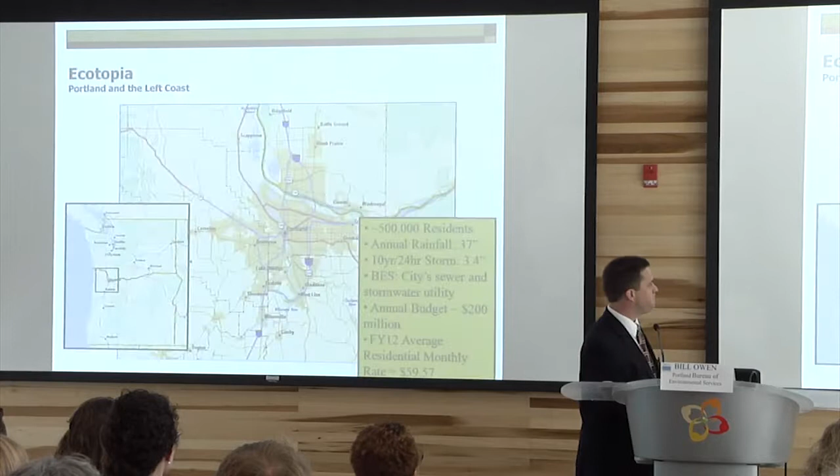The city of Portland is located in the Pacific Northwest at the confluence of the Columbia River and the Willamette River. It has a population of about 500,000 people, and we see about 37 inches of rainfall, which is less than what you folks see here. But our 10-year event, given our rainfall patterns, is only 3.4 inches, about half or just slightly less than half of your similar size event, just for context.

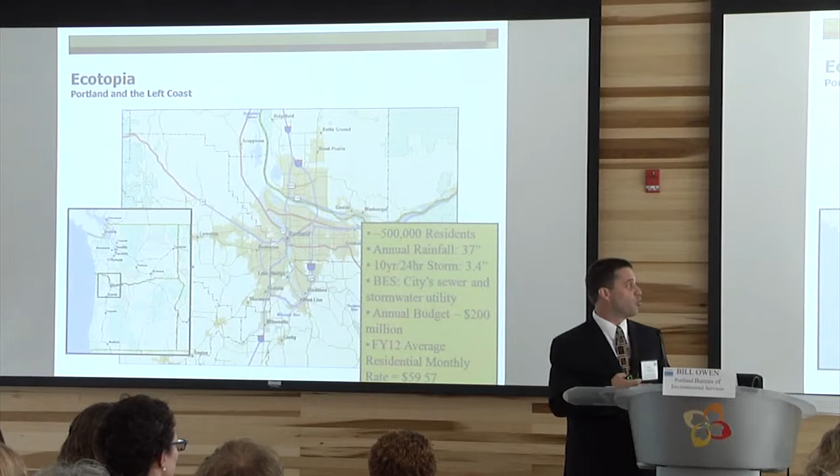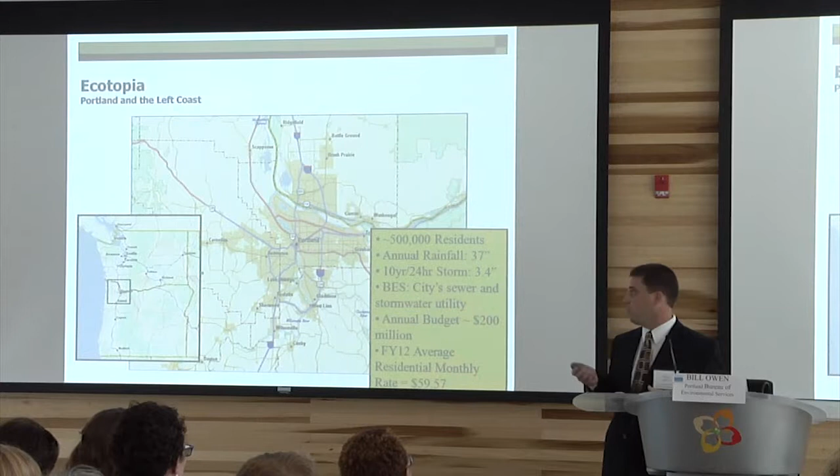I work for the Bureau of Environmental Services, a department that's the city's sewer and stormwater utility. We have about a $200 million annual budget, split approximately in half between operations, O&M, and capital work. We're funded as an enterprise utility through sewer and stormwater rates, and right now that's about $60 on average for a resident. Council just passed the rates for next year, and it's going up 5%.

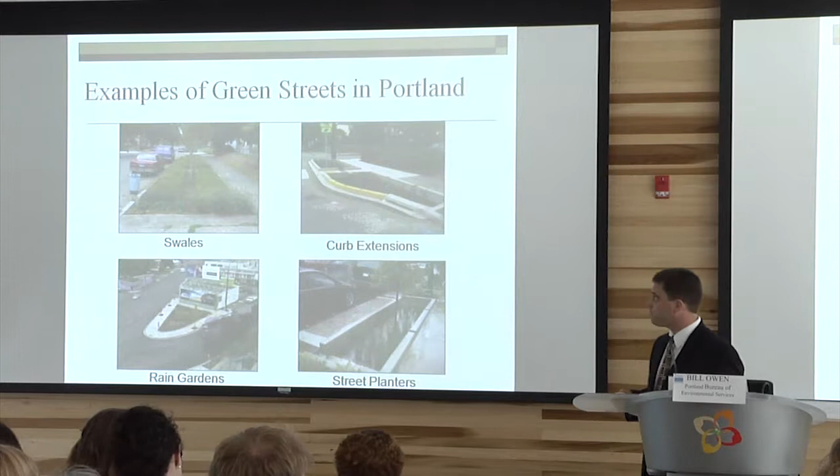So I'm going to be talking a lot about green streets in Portland. This slide gives you an overview of what green streets look like in general. These are all infiltration facilities, generally with no bottom, filtrating right into the native soil. The swales and planters you see are built behind the original curb line and the sidewalk. One type has more concrete to them, the street planters, seen more in our commercial settings.

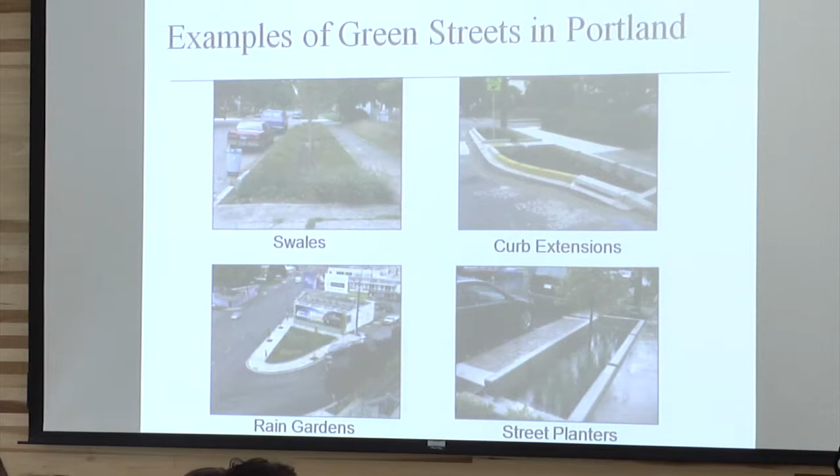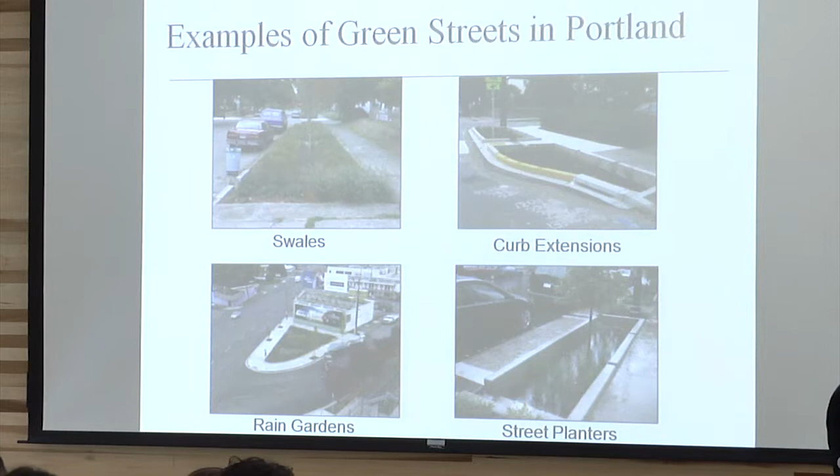In addition, you can see quite a number of stormwater curb extensions in our city. These are facilities where the original curb alignment has been moved out into the street by 4 or 6 feet or so, where water can go directly from the gutter straight into the stormwater facility. In certain locations, not as many, we have some larger green infiltration facilities, what we call rain gardens.

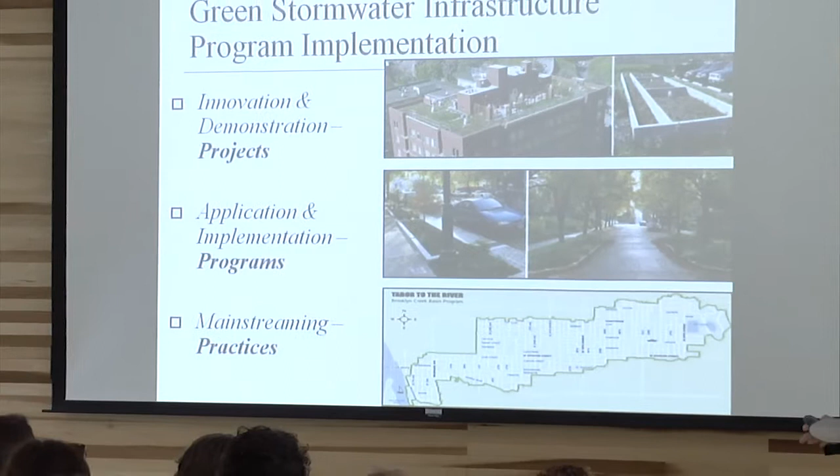Let me talk a little about how we got to this point. As with many programs, you start out with some innovative ideas that, at least for your area, seem pretty neat. You go through some demonstration projects to see if the ideas actually work out in the field. So we did a couple of demonstration projects, but then we learned that if these things are really going to stick around, we need support mechanisms and programs to allow them to flourish.

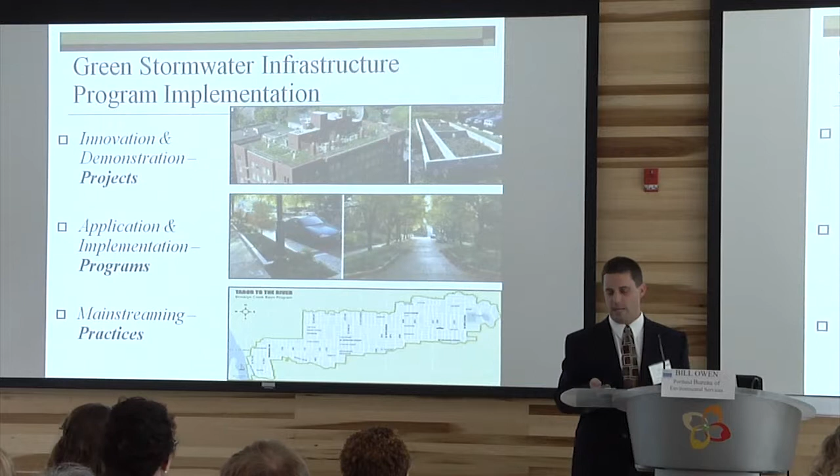After a little while, more programs came into being internal to the city, and eventually we got to the point we're so comfortable with it that we started adopting these into our mainstream practices. I'll talk a little bit about each of these.

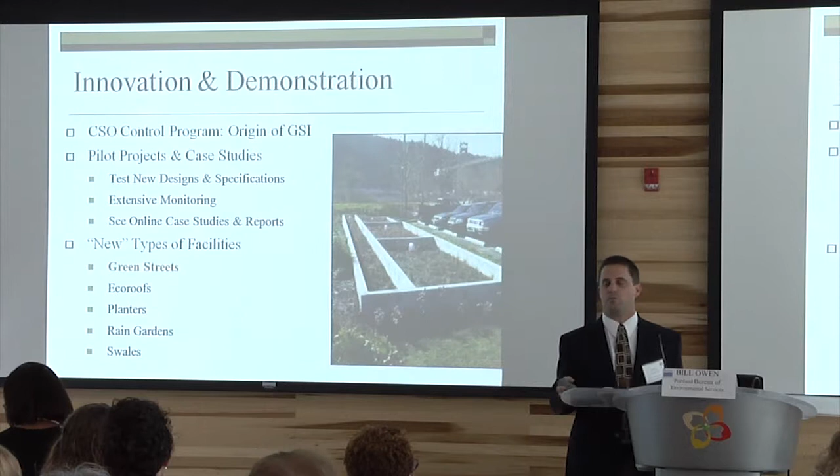Green infrastructure actually started in Portland in the early 1990s as part of the combined sewer overflow program. In our area, we've historically had problems with the combined sewer system, with stormwater and sewer getting into the same pipe, then discharging into the Willamette River. The Willamette River goes straight through the middle of town, so it's very visible, and there were notices all the time when there was overflows—just not a pretty sight.

So we started a 20-year, $1.4 billion program to relieve most of those overflows, and I'm happy to say we just finished those.

But initially, we started off with some green infrastructure work, downspout disconnections, storm separation, not much green, but even sumps, which infiltrate water into the ground, deep into the ground.

But later into the 90s, we started looking at more pilot projects for green streets, some of the ones that you saw up here. And we started doing testing out of our lab with a facility there just to determine how effective these facilities might be as we keep building these.

What the Sustainable Stormwater Program did a great job of is they continued to do this while monitoring what was happening, and they documented it and reported it. A lot of those case studies and reports are online, and I'll give you some links to those sites at the end of the presentation.

So we were messing around with green street facilities and eco roofs all through the early 90s into the early 2000s. The downspout disconnection program was wildly successful early on.

So in 2000, they came up with a solution for that, which included basically separating the combined sewer from the stormwater. There's over 120,000 linear feet of new sewer pipe in this original design, shown in green here. But you also see a lot of other colored lines, which indicate pipe that had to be replaced in the combined sewer system as well. This was about $140 to $144 million worth of work.

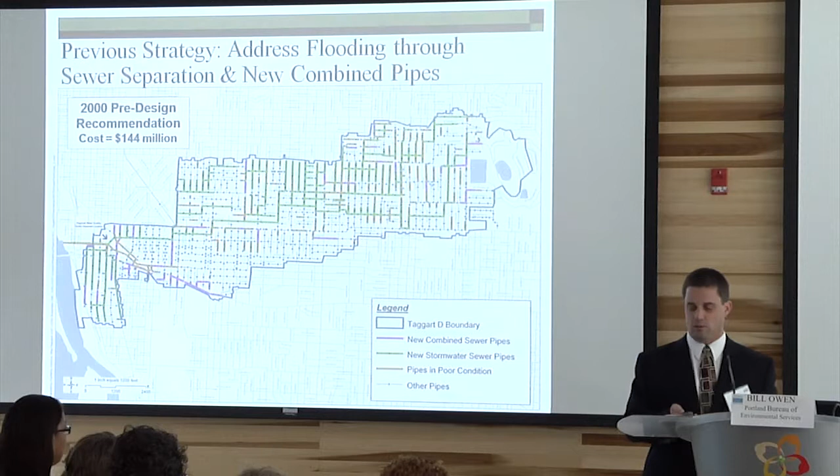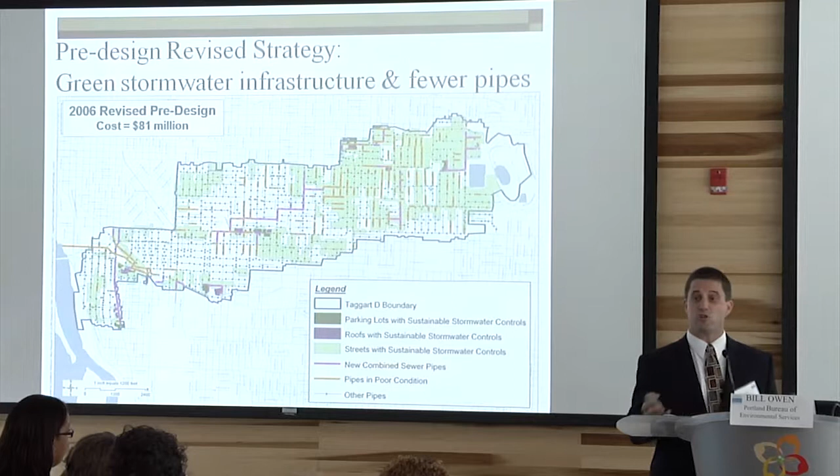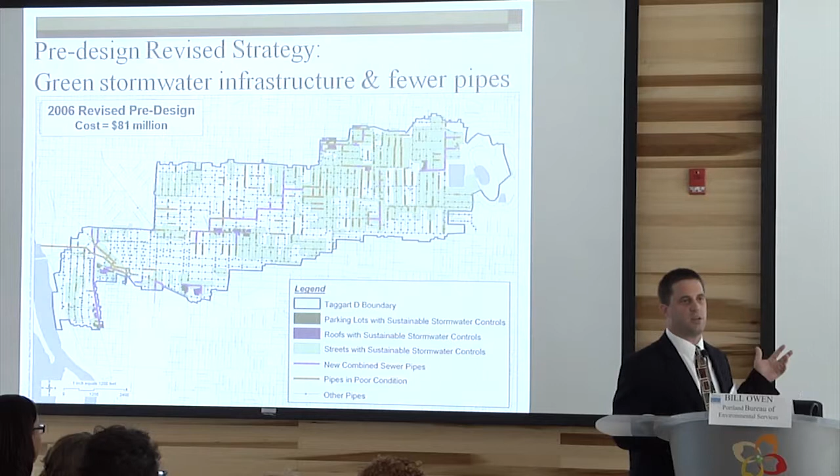But this was just at the point where demonstration projects for green infrastructure were starting to move forward. In the mid-2000s, they asked me and another team to come up with an alternative design that embraces green infrastructure, uses these new standards, and re-looks at the pre-design. The result is what you see on the screen: an $80 million fix, about a $60 million difference.

Instead of having 120,000 linear feet of new pipe, we have 500 Green Street facilities put in here. The green polygons on the map represent drainage areas to each Green Street in this case. But you also notice there are a lot of colored lines up here.

Green infrastructure does great work, but it's not the solution for everything. In this case, there's lots of combined sewer system that still needs work, whether the pipes have to be upsized or just replaced because they're too old.

In addition, because we had this green theme, we tried to do as much as we could in the right-of-way, but that wasn't enough in some cases. So in very targeted areas, we identified areas for partnerships with adjacent property owners to manage runoff on their own sites. That's what you see up here in purple and in dark green.

I'll talk a little more about the program. As this was finished, we rolled out a new project delivery team to complete this work instead of using our traditional CIP team to finish design, construction, and so forth. We tweaked that a little bit.

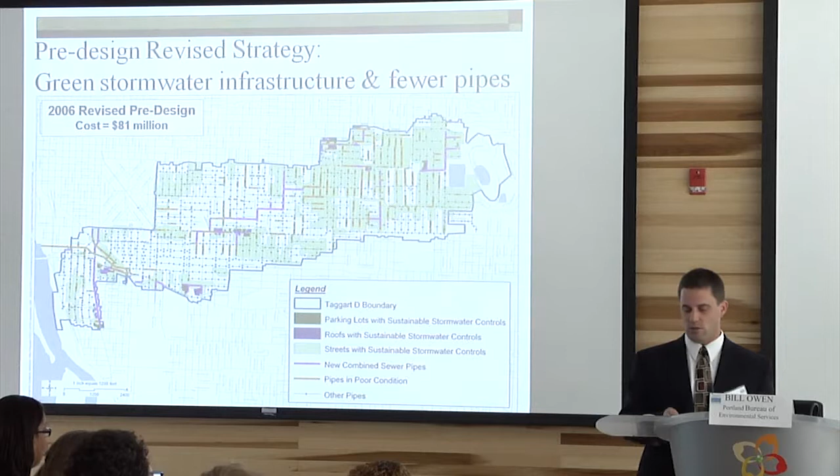Now we have landscape architects on this group, a public involvement specialist, and environmental scientists, in addition to folks like me who are engineers and technicians. So the Tabor to the River program has 4 components.

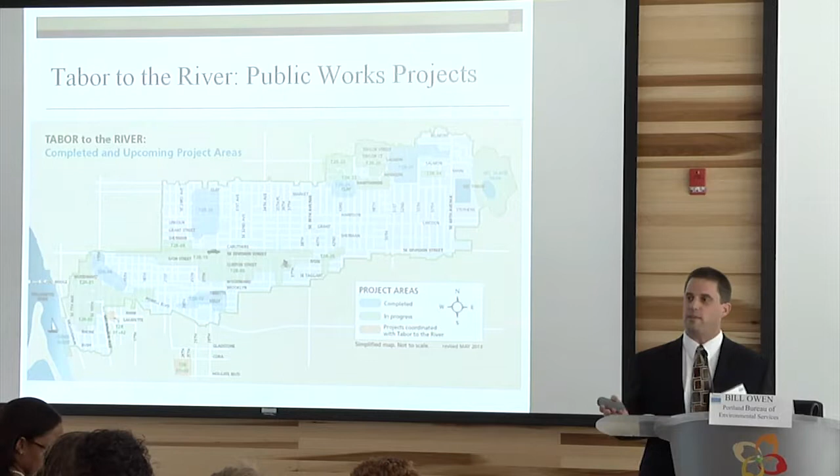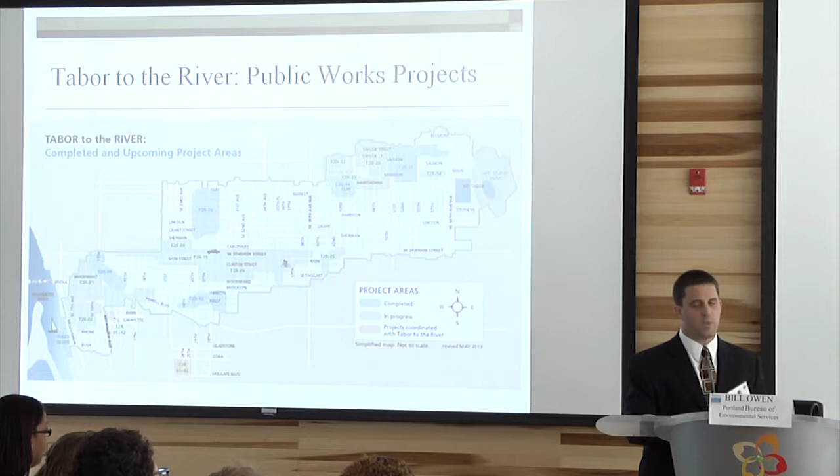One includes capital projects, which is the bulk of the money. There are about 35 different areas within this program area that consist of all the capital work. The blue areas on screen represent projects that have already been completed, and the green areas are the active projects, either in design or in construction.

On the private property side, remember these are just targeted areas, this is not across the basin.

We go out and talk individually with residential and commercial properties within a given area and say, listen, we can give you a little bit of money, not a lot, and we can help you with the permitting and some of the other technical pieces of it, and would you be willing to retrofit your own property to allow water from your parking lot or your rooftop to go into this new rain garden. In this case, it's a residential rain garden, before and after shot.

And the property owner says, sure, that's great, under the best case scenario. The only thing the property owner has to do is sign a long-term O&M agreement that says they will maintain this facility because it's partly a public facility. That agreement is attached to the deed, so regardless of property owner changes, that piece is still part of the deed.

A third piece of the program is vegetation and livability. We love trees in Portland, just like many places in the country. The goal here is to plant 3,500 street trees in this program area. We also have 30 acres of parkland and open space that we want to revegetate and get rid of invasive species. And finally, we recognize the value of having green open space, not only for stormwater purposes, but also for livability in a neighborhood.

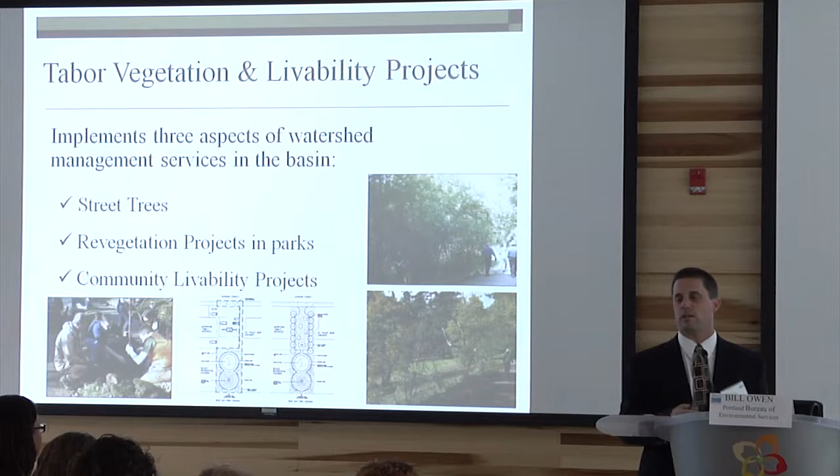One of the biggest, at least fundamentally, parts of our program is public outreach. All of our capital work in the city has a public involvement specialist involved with the project, but this takes it a step higher and says, we have to not only do public outreach on a particular project, what happens next to your house, but across the program area. So the program area-wide outreach continues throughout the 15 years of this program, not just when the projects start and stop.

As all of you know, people learn from different varieties of communication, right? So we use a trailer on a bike sometimes to have a mobile community event that we can move around in outdoor settings that shows how eco-roofs and green streets affect neighborhoods.

In some cases, we partnered with a local college and photography students to come up with shots of green infrastructure that was done on property. And now we have an art exhibit of stormwater infrastructure. This exhibit travels from coffee house to grocery stores and other places in the community and stays there for a month or so. So people see it as they go shopping and say, oh, what's that? And there's a little plaque explaining what that involved.

On the project side, remember that was programmatic. On the project side, we've amped up the outreach a little bit by allowing the adjacent property owners to choose the plants that will go into the Green Street facility, so there's some connection with them to the eventual vegetation in the facility.

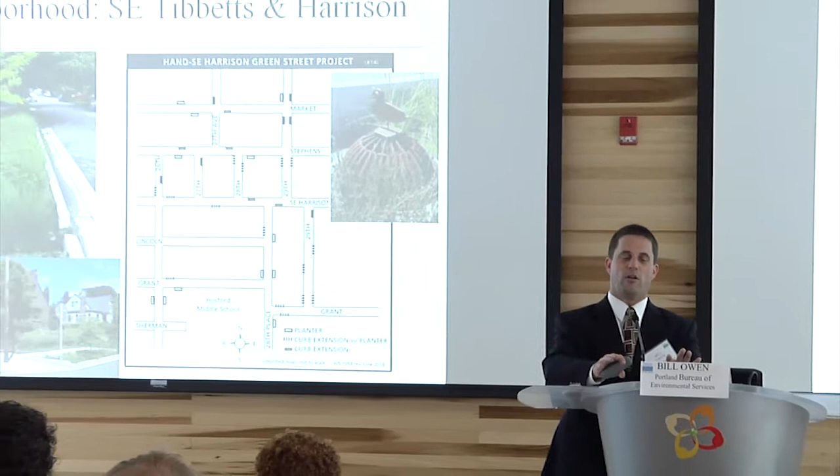We had a lot of swales that you see in the upper left-hand corner here, as well as curb extensions. In this case, on the bottom left, you can see there are two curb extensions at a corner, but in addition to that, we built out the corner, pushing it out a little bit. So now the pedestrian using that corner has a shorter distance to travel from one ramp to the other, which is important, particularly near schools, which is the case in this area.

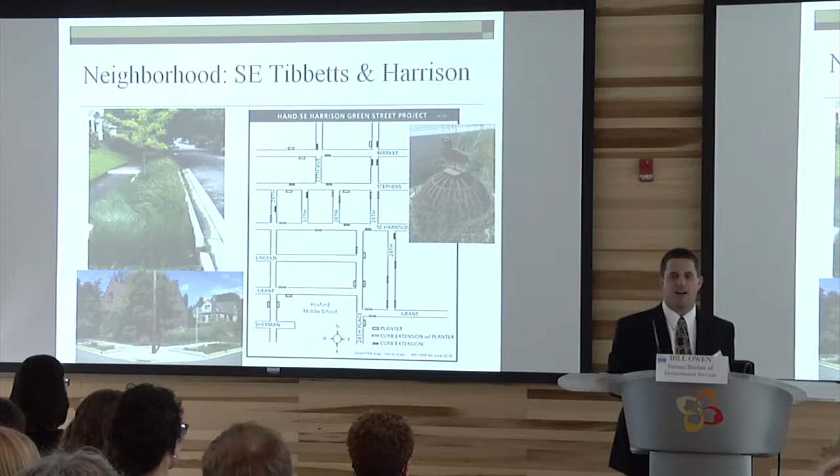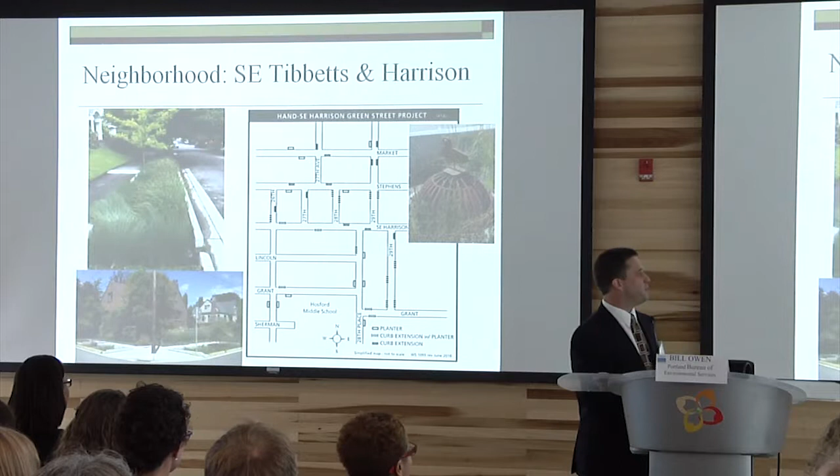I put in the photo on the far right because I just thought it was funny. Someone decided to put a smiling duck on top of our cast iron grate, which is the overflow of our Green Street facility. I thought, hey, this is some level of appreciation that the community thinks this is good stuff. At least that's how I interpreted it. Whether or not that's true, I'm going to go with that theory.

So a couple things to think about as you put Green Streets in the right-of-way. There's more than just Green Streets in the right-of-way, right? The street was there first. There are utility poles, there are mailboxes, and there are trees. The trees in particular, I found this interesting.

Some tree species just can't handle a lot of extra water that gets infiltrated right next to them. For decades, they've been accustomed to having a little bit of water infiltrate in that planting strip. But now the city puts in this infiltration facility, and there's all these gallons of water now, and in some cases it'll kill the tree. So we work pretty closely with the Urban Forestry Department to see where green streets are appropriate in relation to mature trees. In addition, of course, traffic is on streets.

Initially, we didn't put any paint on our curbs, so people started parking there. Why are people parking in the travel lane next to a curb extension? This is not what I was considering when I was designing this thing. So now we paint them yellow, so the parking enforcement arm of the city can go out there and ticket those folks.

Unbelievable. So the other thing is, you're accustomed to driving certain patterns in your own neighborhood for years and years. But now here's the curb has moved. And if you're out late at night enjoying life, the next morning you can find your car may be inside this curb extension. That's what happened in this bottom right-hand corner.

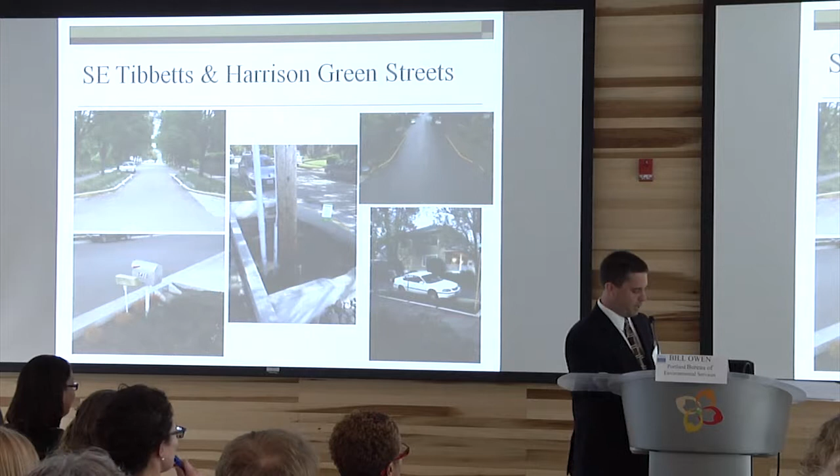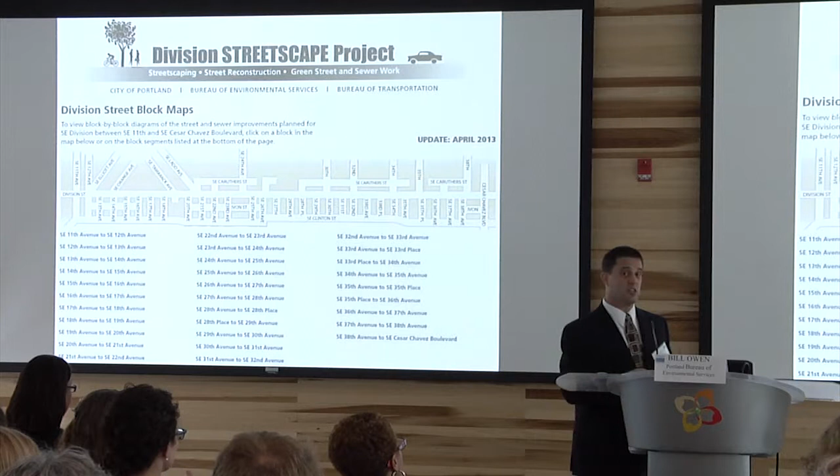The next project I'm going to talk about is the Division Streetscape project. The Transportation Bureau initiated the streetscape concept and finished their concept design in 2005. Our bureau also has an interest, as part of the TABOR program, to improve stormwater and watershed goals in this area. So we recognized both of us are doing work in the same area, so we have a joint project now. The design just finished and just advertised. The idea here is to combine both ideas.

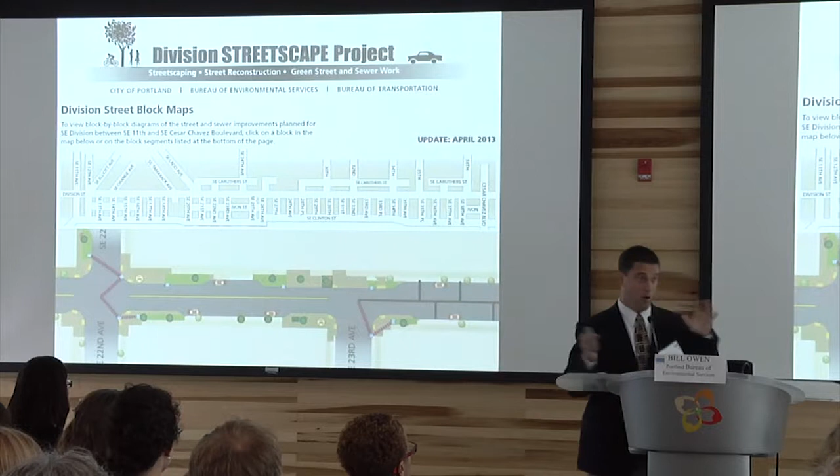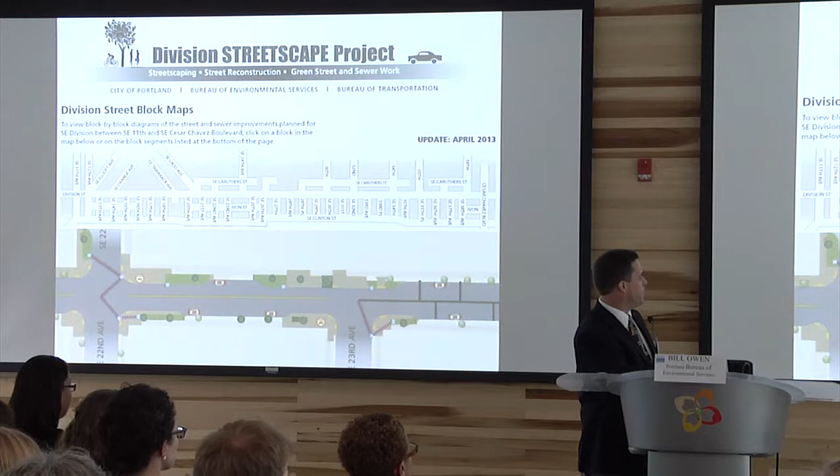Initially, Division was a 4-lane arterial route. Transportation Bureau decided to cut out 2 lanes and leave those spaces for parking for the commercial, residential and retail district in that area. But that opened up all sorts of opportunities for green infrastructure here. You can see these light green areas where the stormwater facilities will now be located in one block, just one block of this 25-block area. Construction starts this summer and will last about 18 months or so.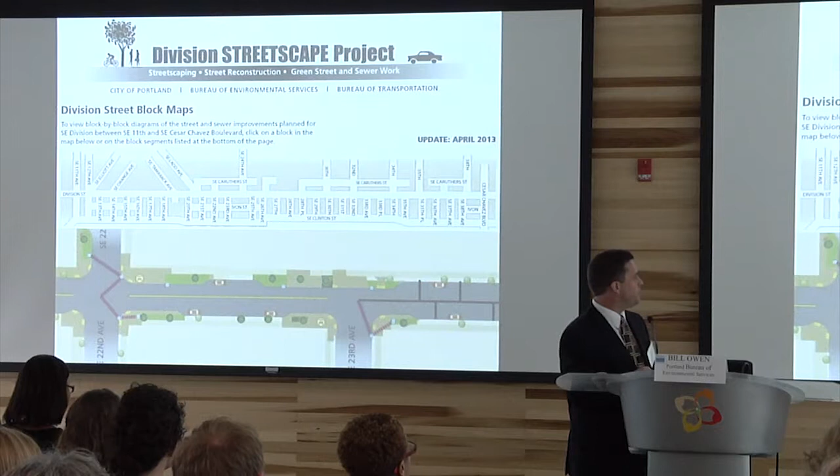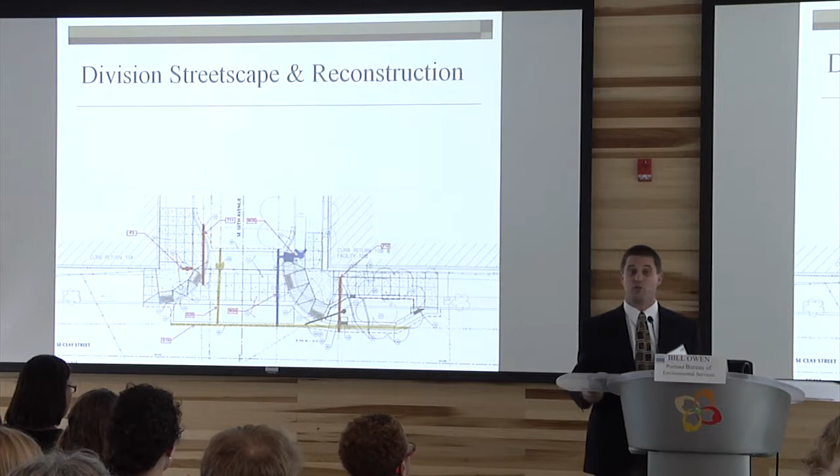So the street not only has things on the surface, but the subsurface as well. For any design, you have to figure out where the utilities are. Green streets are no exception. So the green streets are there, and then all of a sudden you realize there's a gas main right there, or a service line to someone's house. What are we going to do about that? Is it okay if water just travels right past it? You have to work with your franchise utilities and partnerships to figure out what we're going to do to protect your assets as well as do the work that we want to do.

So in some cases, you put a rock gallery. Or in other cases, you end up putting a plastic liner on the street side to protect a pipe trench that the Water Bureau built, because they don't want stormwater traveling down their trench and compromising their structure. And even after you do all of that work, you start construction, and then, oops—it's kind of hard to see. Whoops, my bad.

But there's a 30-inch steel main there, and it wasn't on anyone's records. Maybe that doesn't happen in New Orleans, but it happens in Portland on occasion. It was like, oh my gosh, 30 inches, that's a big deal. Well, in this case, thankfully, it was abandoned, so we could just cut right through it and put in the lead we needed for the under drain. But yeah, things like that happen. It's a busy place, the right-of-way is a busy place. But there is room when you work with your partners to make sure you can come up with both goals to make sure this happens.

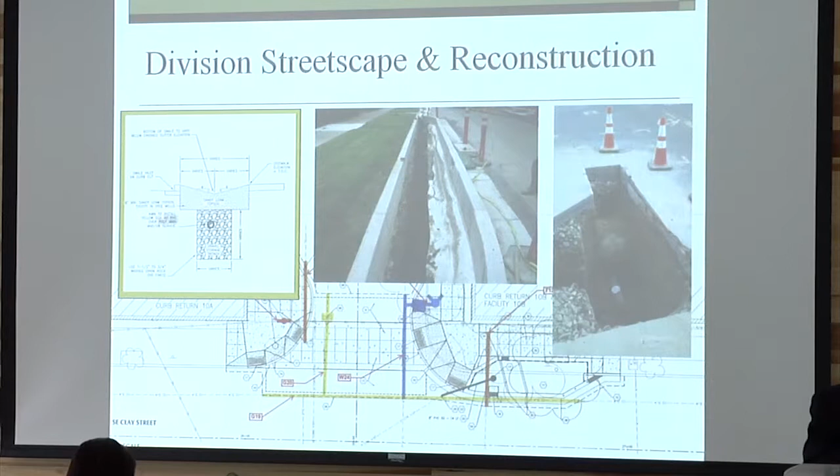Another example is a neighborhood greenway up in northeast Portland. This project just finished construction last week, and it was initiated by our Transportation Bureau to improve bicycle mobility through the city. They turned all the stop signs so bicycles can continue all the way through without stopping, except for the really busy intersections.

This was a really cool project, because as a sewer and stormwater bureau, we had a similar interest to further our mission work as well. On the far left, you can see a curb extension, again with yellow paint, that helps delineate along with the new stripes in the street and the concrete traffic island where bicycles can go and where vehicular traffic can go. This particular intersection was kind of complicated, and there were a lot of accidents between bicycles and cars here, so it was a big improvement, we think, for safety purposes.

The center image is a block that the transportation bureau blocked off for vehicular traffic. No cars or trucks can go through there anymore except for emergency vehicles, and it's right next to a school. Bicycles and pedestrians can continue going through. But we tore up the road and changed it so everything sheds to one side. From the way you're viewing it, from the right, all the water drains to the left side where there's a curb extension, and the water drains and infiltrates into that curb extension.

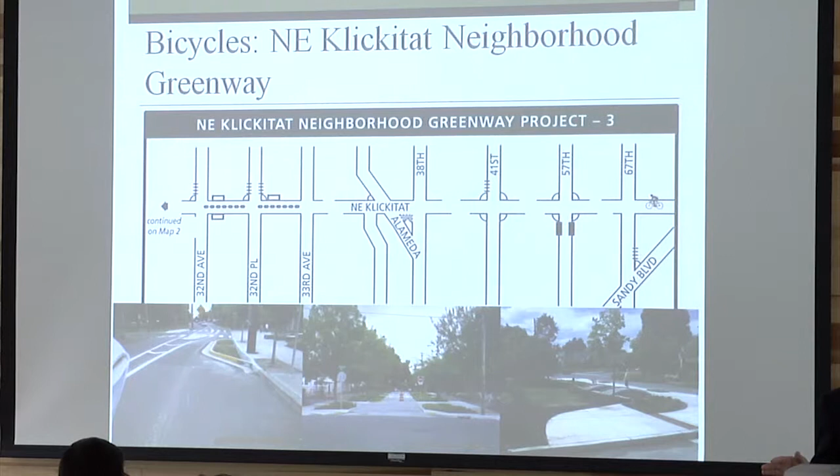In our city, the message is clean the Willamette, clean the Willamette, and this hopefully is another step towards that. One thing I didn't mention during the public outreach slide is that consistent messaging is key. For us, it's clean rivers, clean Willamette. Yours might be something like flooding protection to some degree—something that people can easily recognize.

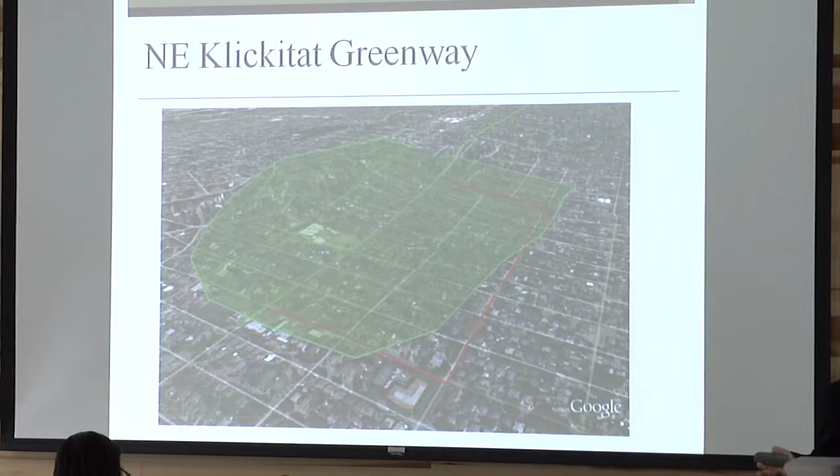In this case, we had a project where we were pretty focused on what's happening in the project area, but not necessarily what's happening 2, 3, 4 blocks away, which was a bad thing to do, at least initially in design, until some of the older residents and someone else in our group identified that this area used to be agricultural land, and there was a farm pond 3, 4 blocks away. So we started talking to people who had property where that farm pond is, and sure enough, in the wintertime when it rains a lot in Portland, their backyard is basically a sponge. They're already having problems with high groundwater, so putting Green Street facilities just up the hill there wasn't a good idea. Even geologically, you can make the argument that the water up there won't get to that point, but there's a perception issue. So we just decided to get rid of the Green Street facilities in that particular area, those couple blocks. The rest of the facilities in the project stayed.

Finally, probably one of the most challenging projects I've seen to date is putting green infrastructure in a freight district. Usually we put these in residential areas. There are parking issues there, and that's an inconvenience, but in a freight district that's a big deal because you have trucks moving and parking problems.

There's a concept design that includes some artwork finished in 2010, and some initial projects started. But this was a bear to design. We actually had to go through each intersection, interview all of the businesses, and ask what type of trucks, how big are the trucks you use to deliver products to your stores, then do some design work to find out how those trucks turn.

So we know we don't want the trailers of those trucks dumping into the Green Street facility, kind of like that car did a couple slides ago. And so the curbs here have a kind of funky design to them, but they follow the end of the trailer of these trucks, and that's the whole purpose of them.

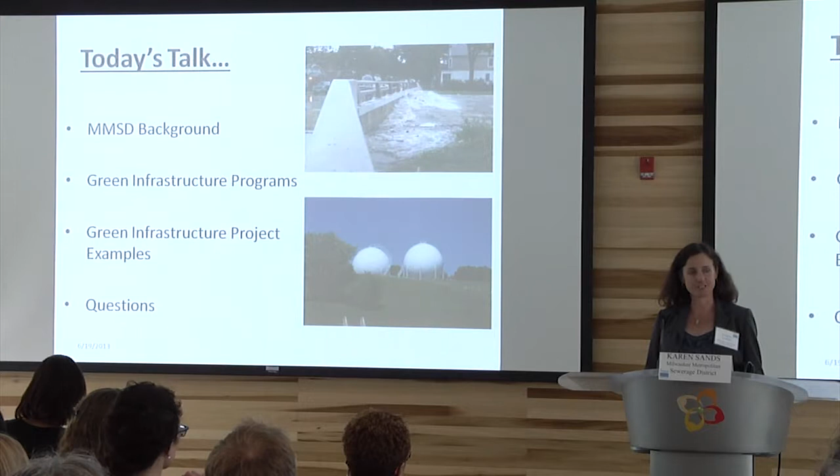North is at the top, and on the right is Lake Michigan. The city of Milwaukee is one of 28 municipalities we serve. It's about 25% of our area, though, so it's very important to us. We serve a little over 1 million customers, and our entire planning area is 411 square miles. Our service area is a subset of that, somewhere on the order of 370 square miles or so.

In the rest of the region, that other 94%, in most of our communities, we have separate sewers—a system for stormwater, and that stormwater typically goes to area waterways completely untreated. So you can see how green infrastructure might be a benefit there.

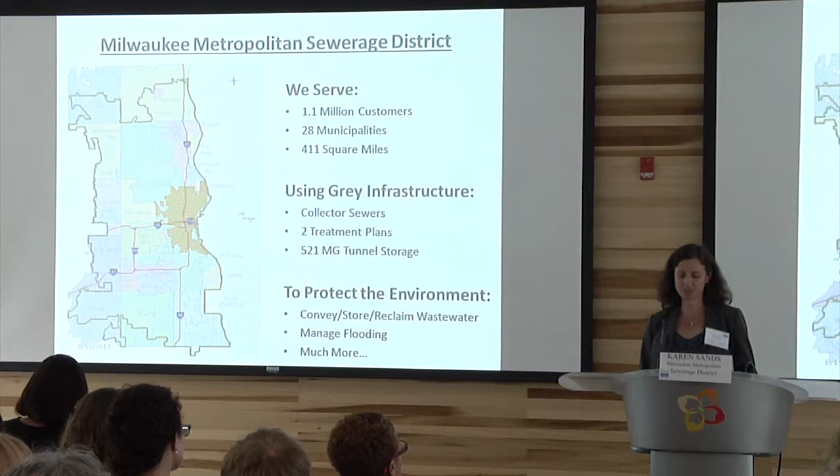We also have an extensive tunnel system—you heard Marco mention that. We call it the deep tunnel. That's the easy name for it, but it's both inline and remote storage that totals 521 million gallons. We reserve that for when we're having really big storms and the amount of water coming into the system that would go to the plants might overwhelm the capacity. So we temporarily store that water—either sewer water or combined sewer and sanitary—in the tunnel until the system can catch up and take care of it.

There are times, though, a little bit less than 3 times a year, where even that's not enough. So we're looking to figure out how green infrastructure capacity can help us. We are in the process of finishing up a green infrastructure plan that has a capacity, all told, of 740 million gallons, which is really an extraordinary amount of capacity per event. It would be larger than our tunnel system, it would be costly, and it would be a culture change.

To me, it's very exciting because I think it will essentially green the region, not only helping us handle stormwater better, but really changing everything. We have looked at, for instance, property value impacts of green infrastructure. We see increasing property values. We see all kinds of quality of life issues, reduced urban heat island impacts, all kinds of things. But I'm getting ahead of myself here with my excitement about it.

So with all the gray infrastructure that we've done, we have really reduced overflows significantly. We used to have 40 to 60 events per year. Now we're down to just less than 3. As a result, the Milwaukee River, as well as the Menomonee River and the Kinnickinnic River, all of which coalesce in downtown Milwaukee, have really become much cleaner. Instead of businesses turning their backs to the waterways, now all kinds of restaurants and bars and outside walking paths have sprung up. Our river walk is pretty famous.

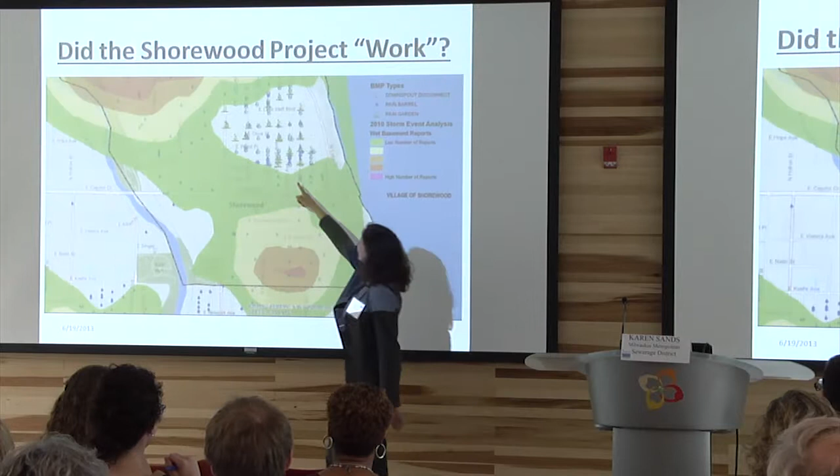Let's see if I remember how to do this. Nope. We'll go up this way. I'm going to just walk over and point. Old-fashioned way. So right here is where you're looking.

There are a lot of symbols there, meaning there are a lot of rain barrels and rain gardens that we helped finance, with the city of Shorewood taking the lead. Those were installed prior to July 2010, which is the color data that you're seeing.

So we record basement backup calls, or wet basements, basically. Where you see red, there's a dense cluster of calls. Orange, less dense; yellow, less dense; green, only a few. And where you see no color, there really were no calls. Now, what you can see in this example is that widespread green infrastructure seems to correspond with no basement backup calls, where previously that was a frequent caller type neighborhood.

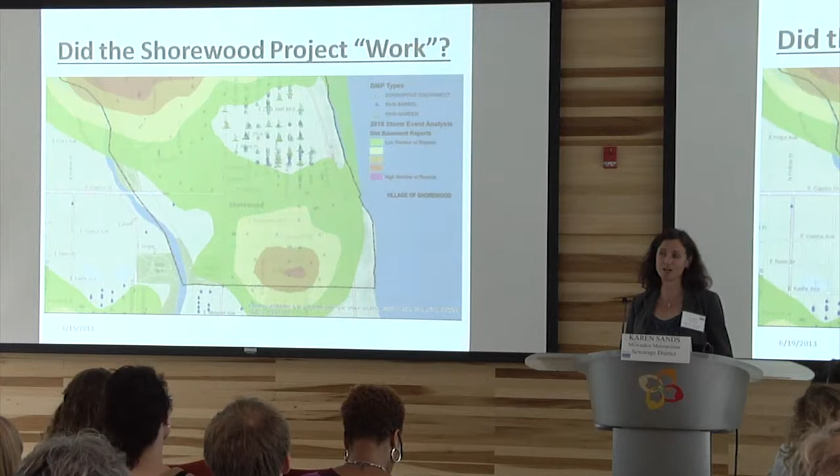So does this mean it fixed the problem? Not necessarily, but I think it's a good demonstration that it can. It's a no-risk solution, green infrastructure that is. So why not try it? You might get this great result.

Menomonee Valley is a great example of an economic development project that's sandwiched between neighborhoods. At the turn of the century, the Menomonee Valley was known as the breadbasket of America. There were dozens of train lines that went through, delivering wheat from the Midwest back east. It was a hopping place, and people from the adjacent neighborhoods would walk to their jobs, with all kinds of connections down into the valley.

Well, with the deindustrialization of the U.S. and recognition of brownfield issues and a number of other things, the Menomonee Valley fell on hard times, and by the late 1990s, there wasn't a lot of business left down there. It was an abandoned area, like you see at the top. There weren't a lot of connections to get there. I've talked to some people who were like, I don't even know how to get there.

And things have changed, through a number of steps. But to me, the primary driver for change was investment in infrastructure that lured businesses back. And it wasn't just in streets and power and whatever else you might need. Major investments were made in stormwater management, not traditional stormwater management, but green infrastructure like you see on the bottom here. That's an overlook of what is essentially a giant bioretention area, dozens and dozens of acres. The city set that aside for green stormwater management.

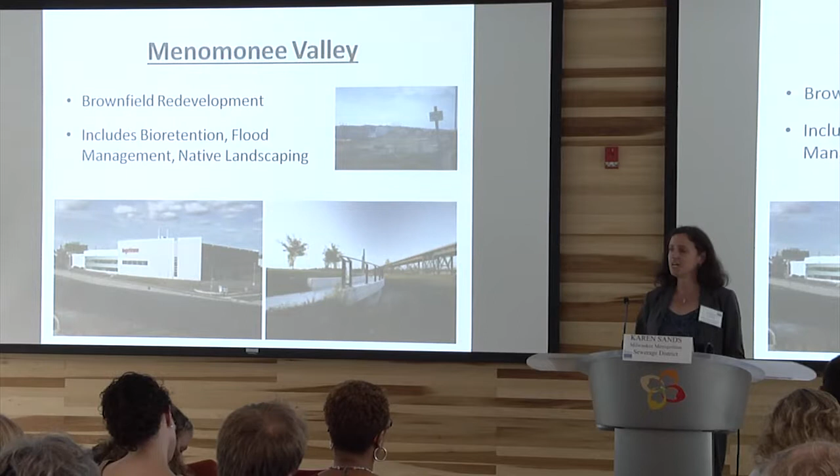That attracted the development of the Hank Aaron State Trail, and really an aesthetic blossoming of the whole valley. As a result, I'm not sure of the percentage utilization, but it's mostly built out, with more light industrial work. Thousands of people are employed again in the valley, and the connections to the surrounding neighborhoods so that workers can again walk or bike to their jobs have been reestablished. To me, that was all drawn by this really unique investment in green infrastructure in the valley.